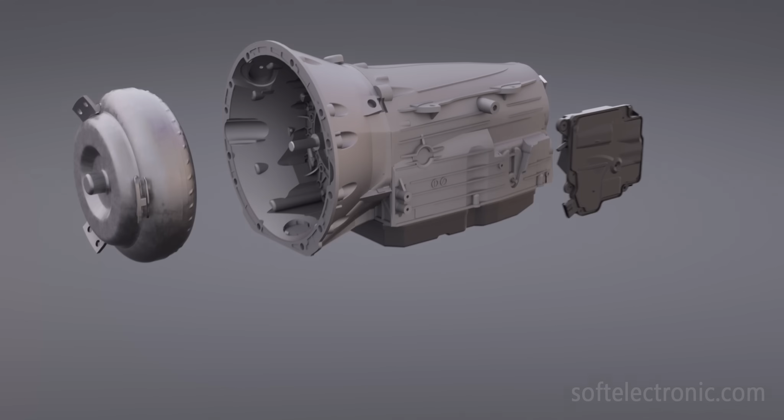In this series of 4 episodes, we will introduce you to the essentials of automatic transmissions. Today, we will look in detail into the advantages of modern automatic gearboxes, their general structure, and the modes in which they work. We will go through the symptoms and causes of an existing or forthcoming problem, and look into what general diagnosis and prevention of a gearbox is.

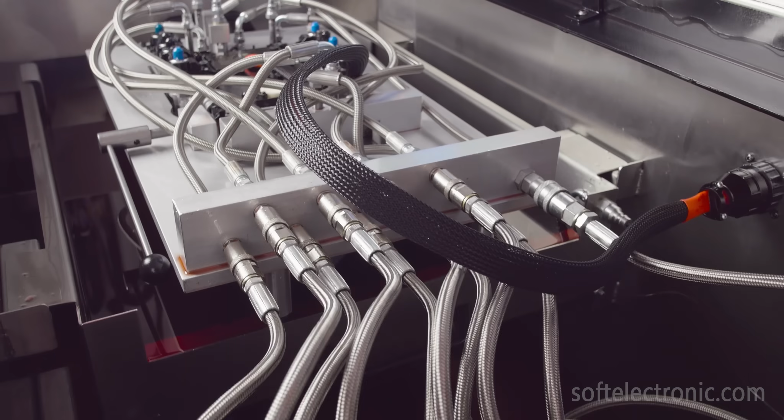In some countries, automatic transmissions have long been preferred over manual transmissions. In Europe, their share gradually increases, and with it, the service points and repair workshops. Diagnostic and repair of an automatic gearbox has become a routine procedure.

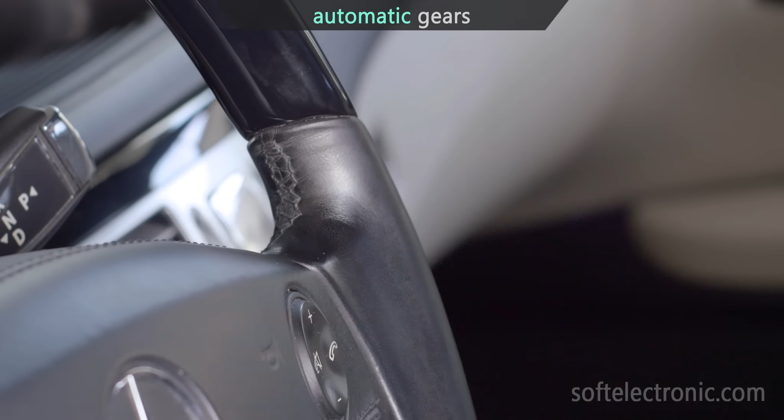Automatic gearboxes are without a doubt much easier to control than manual gearboxes. Driving in traffic is much more comfortable when you don't have to constantly switch gears. The wear of the automatic gearbox in an urban environment is much less than in manual gearboxes. The driver can drive by placing both hands on the steering wheel at all times. This reduces the risk of losing control in the event of an unforeseen situation in traffic.

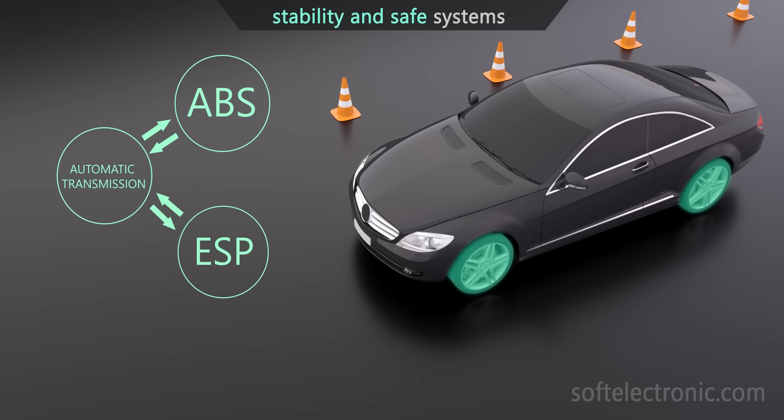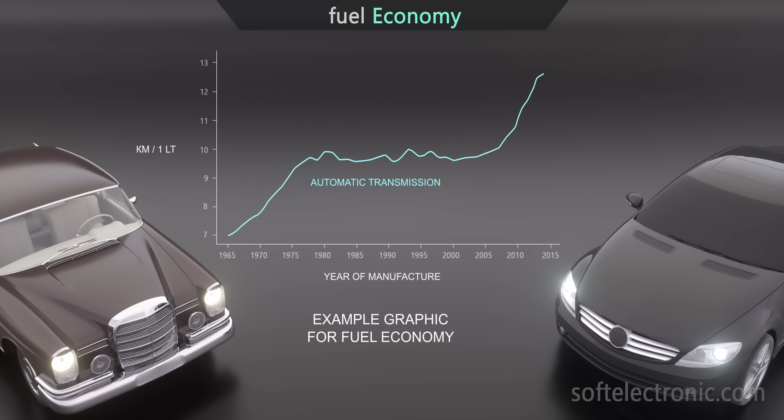Security systems like the ABS and ESP work far more efficiently when combined with an automatic transmission. Autopilot has more options controlling the switch to the necessary gear. Modern automatic gearboxes are more precise and more efficient compared to their predecessors, which makes them not only more comfortable but also as economical as the same car with a manual transmission.

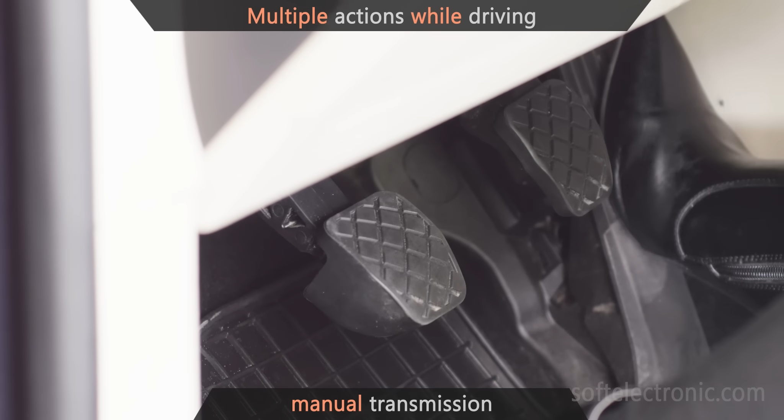In today's automatic gearboxes, the switching time between gears is measured in milliseconds, and it's much faster than switching times in manual gearboxes. The chances of an error during manual shifting are much greater, as the driver must periodically perform several actions during movement, each of which may cause an unintentional mistake.

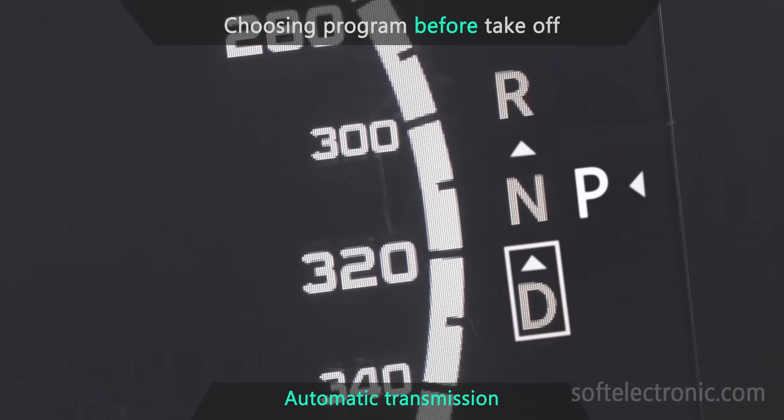In automatic transmissions, the main program for gear shifting is set before the vehicle starts, which minimizes the possibility of gear shifting error. The increase of torque in the automatic gearbox is possible due to the implementation of the torque converter. When driving off, the torque is increased at most.

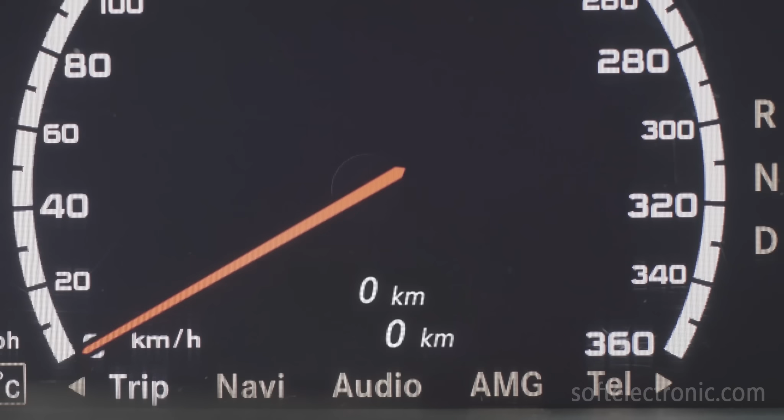With proper care and maintenance, automatic transmissions can have a long life, and repair and spare parts prices are gradually being aligned with those of manual gearboxes.

There are several main modes which are activated when positioning the selector lever. This lever can be connected mechanically to the gearbox or assisted by an electronic module which changes the control positions of the gearbox. The main positions are four.

Parking position is selected when coming to a complete stop so that the car is secure. In this position, movement of the chassis is impossible. In reverse position, the transmission is locked to the chassis and a reverse movement is performed.

In neutral position, the connection between the transmission and the chassis is interrupted. Thus, in case of an accident, the vehicle can be moved to a safe place or positioned on a repatriation platform. In drive position, the transmission is locked to the chassis and a forward movement can be performed.

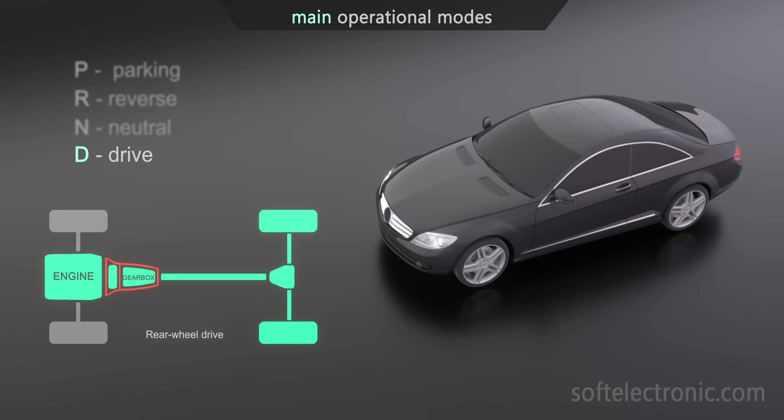The gears are automatically selected by the transmission control module according to the acceleration and speed of the vehicle. The change between positions must be performed only when the vehicle is stationary. For systems with an electronic module for selecting positions, there is a protection that will not allow a change if the vehicle is in motion.

Additional modes may also be available to assist the driver in different situations. In the manual shift or downhill mode, the driver partly takes over gearbox control. If engine revolutions and torque do not match the gear, the computer may in some cases correct the gear by raising or lowering it. The purpose of this action is to protect the engine.

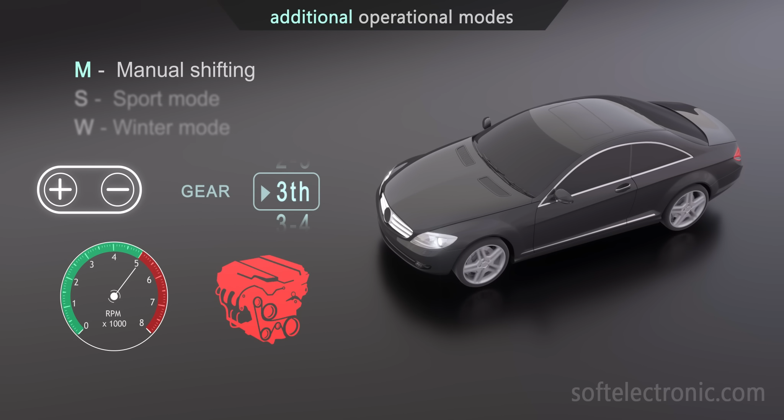In sport mode, the shifting occurs at higher revolutions compared to the standard. This is particularly useful for terrains with multiple turns and short stretches where greater dynamics are required. In most automatic transmissions, switching to lower gears in sport mode is maintained in the same speed range as in the standard program.

In winter mode, the control unit executes a special program for changing gears. In this mode, the takeoff occurs at a higher gear, and thus the initial torque is reduced. This prevents the vehicle from wheel spin on snowy or slippery terrain.

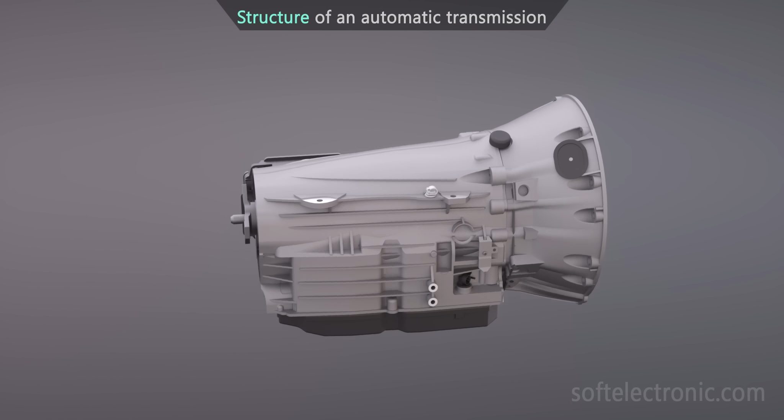To get to know the structure of a standard automatic transmission, we're going to take a look at a 7-speed 7G-tronic with 722.9 code, used in many models of Mercedes-Benz.

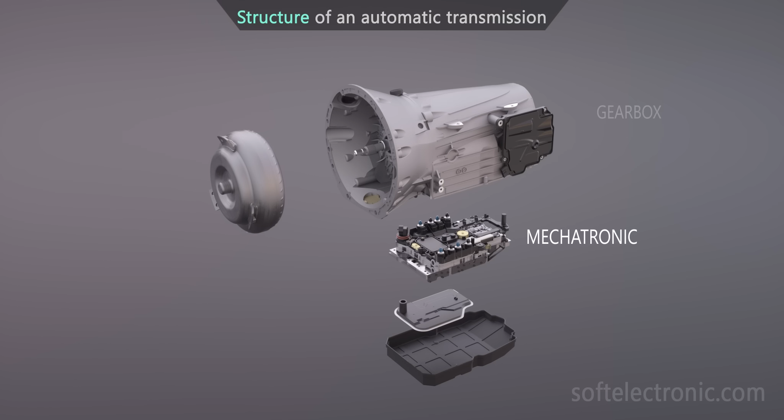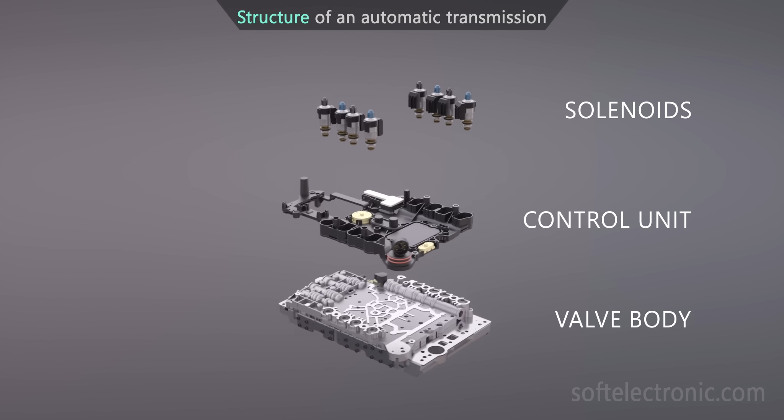We can divide the automatic transmission in three main categories: mechatronic, gearbox, and torque converter. The mechatronic is the control center of the transmission. It consists of the transmission control module (TCM), the valve body, and solenoids. Its purpose is to control the other parts in the gearbox through transmission oil under a certain pressure, which is fed at a specific moment during vehicle movement.

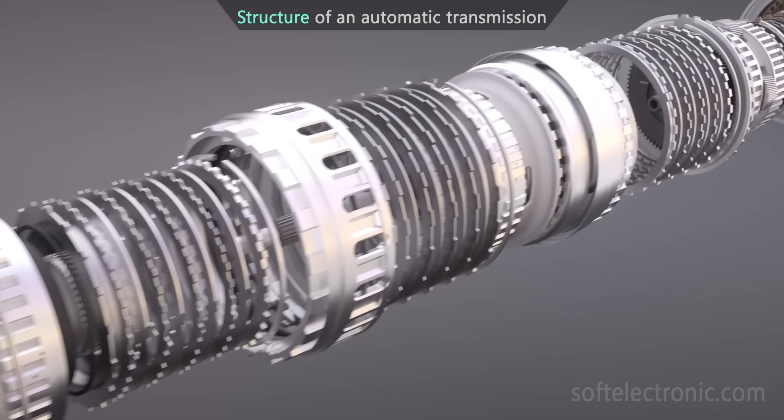In the gearbox, the mechanics go through different modes that characterize a certain gear. It consists of group shafts, gear wheels, clutch packages, and seals. In the front is the oil pump, which is firmly connected to the crankshaft of the engine through the housing of the torque converter.

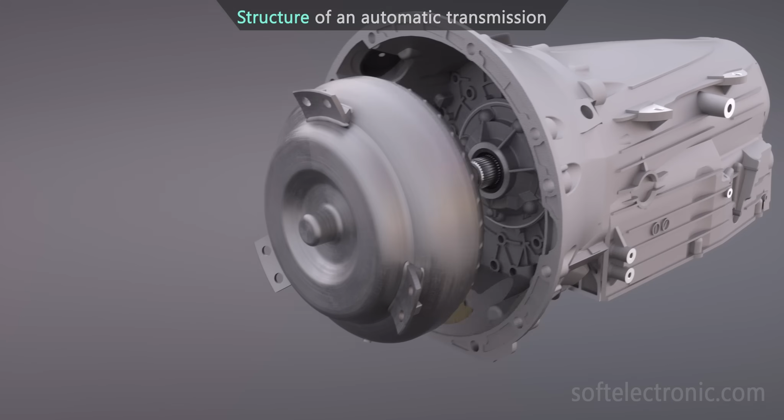When the engine is operating, the pump is constantly feeding transmission oil to the mechatronic. The torque converter is a fluid-based clutch between the engine and the transmission. It has several main functions: it transfers motion from the engine to the transmission, it drives the oil pump in the gearbox, and increases the torque from the crankshaft to the transmission during the movement of the car. When driving off from a standstill, maximum torque is produced. It also operates as a flywheel, neutralizing the oscillations and vibrations from the engine to the transmission.

In the lower part of the gearbox is the transmission pan and the oil filter. Softelectronic is one of the few companies in the world which has repair workshops both for mechanics and electronics for certain automatic transmission models.

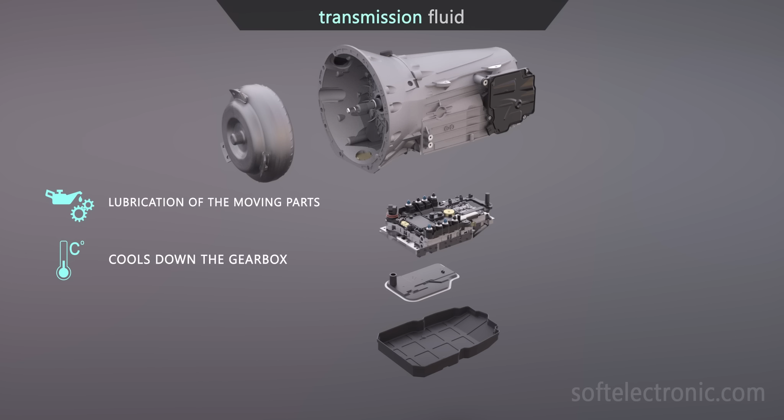In the gearbox circulates transmission oil, which has three key functions: it provides the necessary lubrication of the moving parts, helps the cooling of the automatic transmission, and takes part in the hydraulic system, which mechanically controls the components in the gearbox.

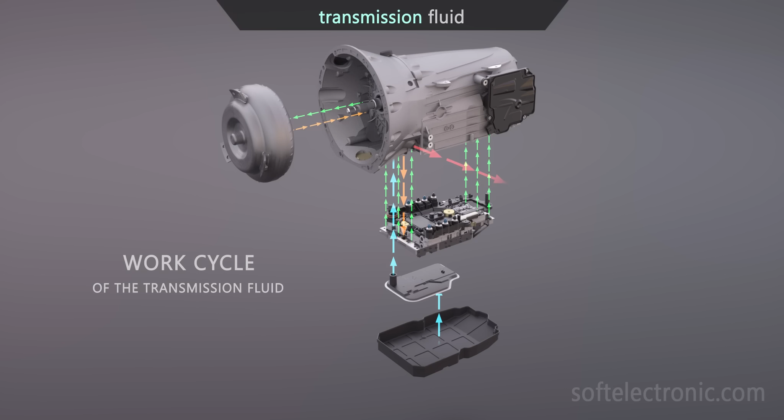The oil has the following work cycle: from the oil pan, it goes through the filter, and from it into the oil pump. The oil pump then forces it into the valve body of the mechatronic at high pressure. The mechatronic regulates the pressure and distributes it to the torque converter and the various sections of the gearbox. After that, the oil goes through the cooling system and re-enters the transmission pan for the next cycle.

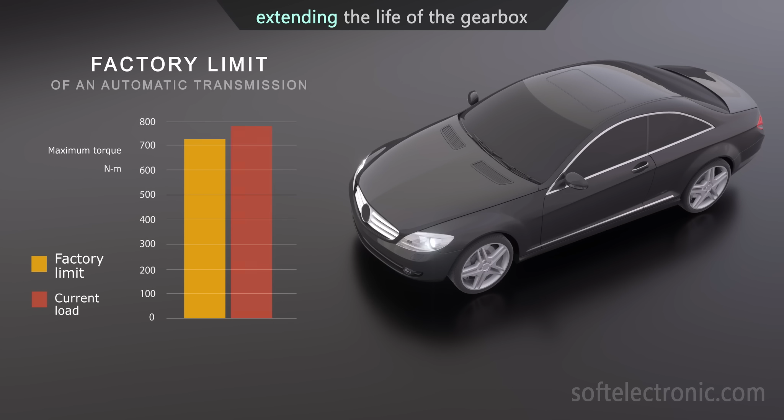Here's some advice if you want to extend the life of your gearbox. You shouldn't overload the vehicle above the factory limit. For example, when tuning the car, you shouldn't exceed the torque limit value described by the manufacturer. Aggressive driving may lead to shortening the life of the gearbox.

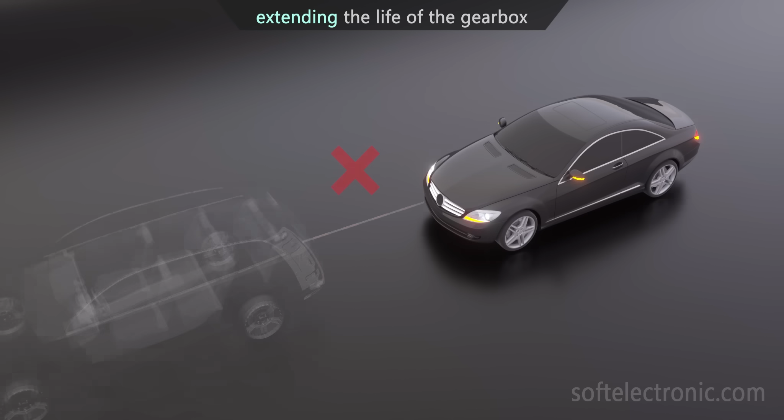In case of emergency, it's not advisable to have the vehicle towed by another vehicle, because the lack of active lubrication may cause a serious defect in the gearbox. Transportation with a repatriation platform is recommended for this purpose.

In winter conditions, it's advisable not to take off as soon as you start the car. You should limit the actions which could cause overheating in the gearbox, for example, when you try to unblock the car in winter conditions, or control it on slippery terrain by repeatedly throttling in one place.

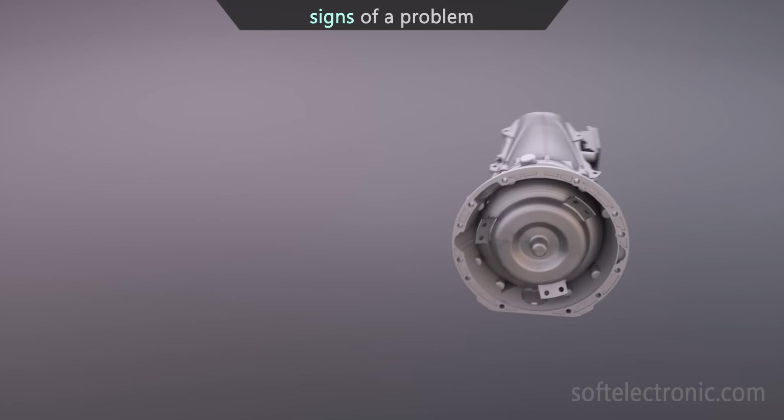One of the most important things is to look for signs related to the incorrect operation of the automatic transmission. When developing any of them, it's advisable to make timely diagnosis and repair if needed. Here are some of the signs.

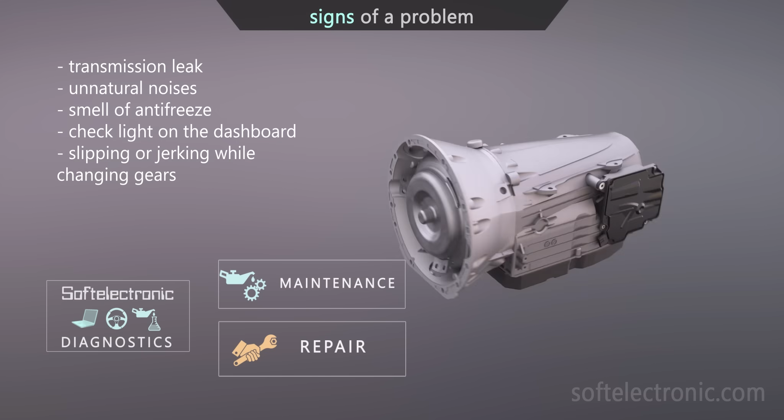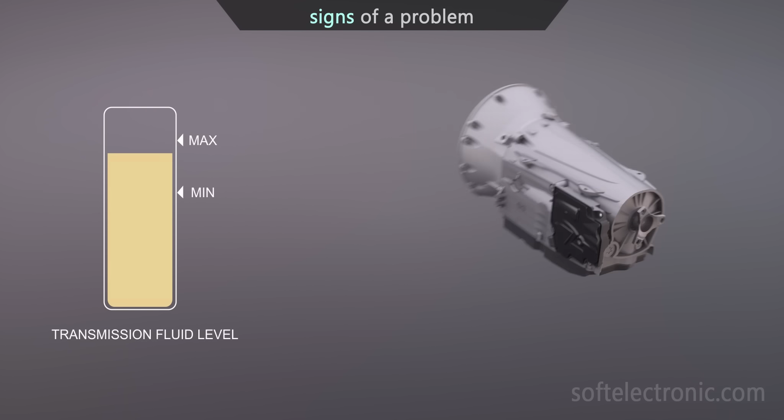Even the smallest leak of transmission oil can lead to a decrease in the level of the oil. In this case, it's best to have it checked in a specialized workshop. Lack of oil can cause overheating and defecting of electronic or mechanical components in the automatic transmission. Overheating can also occur if the cooling system is defective. This is why it's important to have it regularly checked.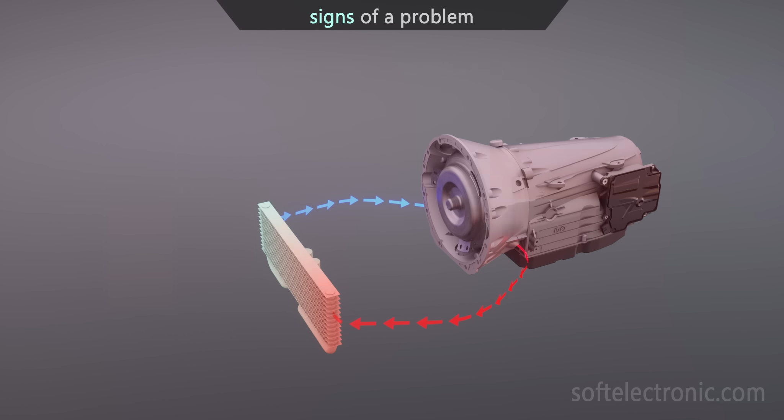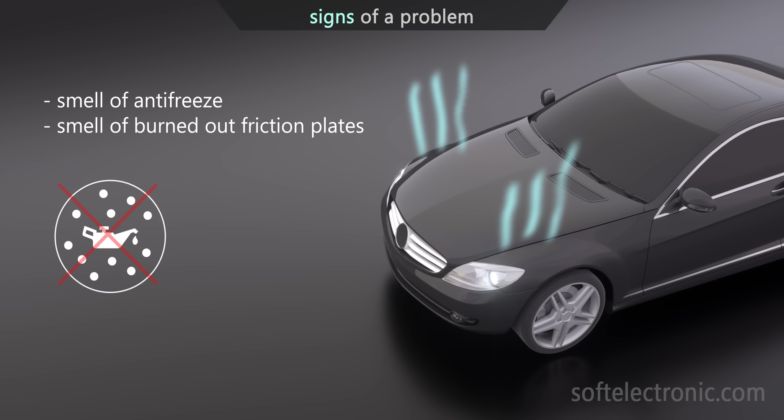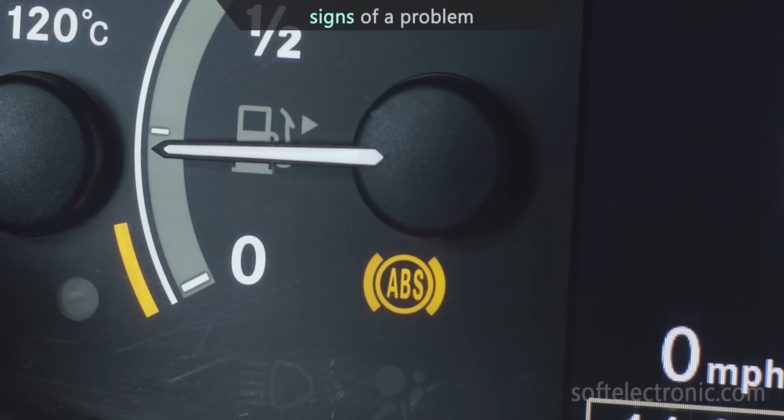Smell of antifreeze or burned out friction plates can also be related to the gearbox. It's unacceptable to have small particles in the oil from mechanical parts and liquids that are not part of the transmission oil composition. The check light on the dashboard for problems with the engine or the ABS systems is not necessarily related to the gearbox, but this can only be diagnosed in a repair workshop.

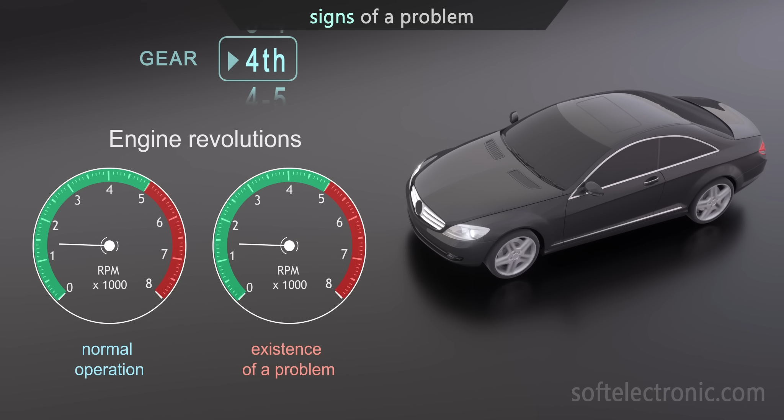The appearance of unnatural noises coming from the position of the gearbox is a symptom of a mechanical problem. The gears should change smoothly. If there is a problem with the gearbox, you could feel jerking while changing gears, or you could also feel slipping in some cases. The driver can notice a sharp increase in revolutions while changing gears. In this case, it's advisable to have the vehicle diagnosed and repaired in a specialized workshop.

The appearance of the mentioned signs can cause the vehicle to go into safe mode. In this mode, the car remains in one gear, usually a low gear, and serves only to move the vehicle to the nearest safe place, from where it can be transported to a repair workshop.

In the Softelectronic workshops, vehicles with automatic gearboxes can be diagnosed, maintained, and repaired.

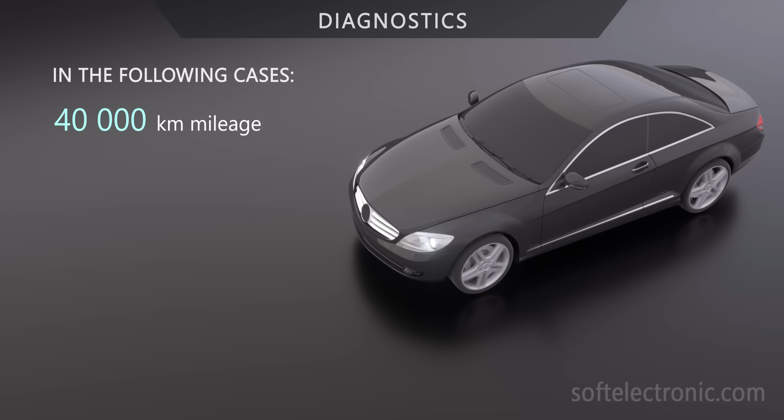It's advisable to have the gearbox diagnosed in the following cases: after 40,000 kilometers since the last diagnostic, in case you suspect deviation from the normal operation of the gearbox, or in case you buy a pre-owned vehicle.

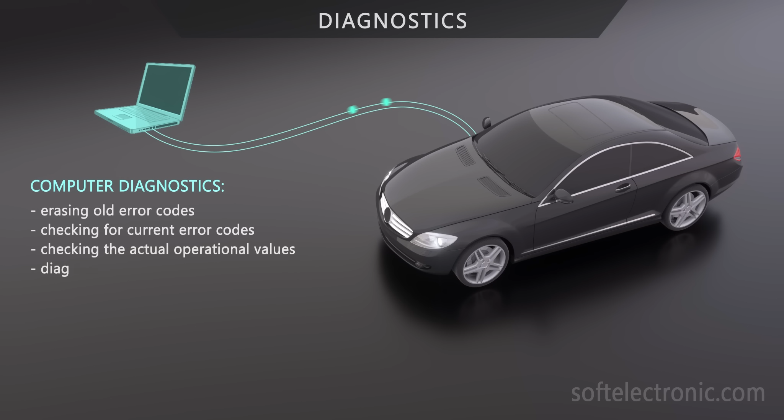The procedures completed when diagnosing a vehicle are computer diagnosis, test of the vehicle, and analyzing the transmission oil. Under computer diagnosis, the vehicle is checked for stored error codes in the mechanics and electronics, and the operating values at which the gearbox operates are also checked.

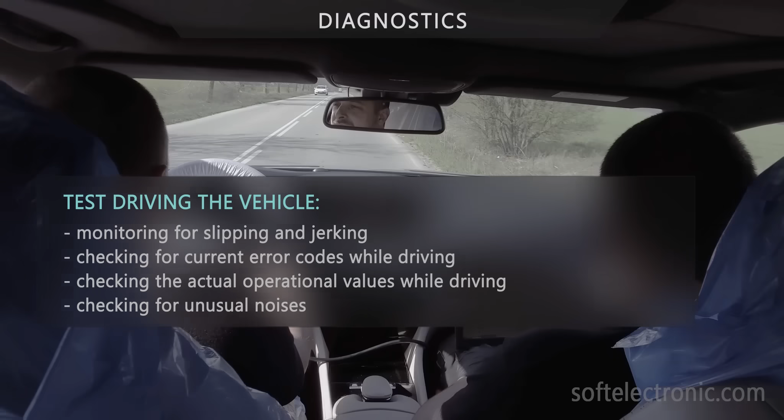When testing the vehicle, service technicians monitor the behavior of the gearbox in real conditions. They look for signs of slipping or shaking while changing gears, and may also discover unusual noises that are a sign of upcoming or future problems.

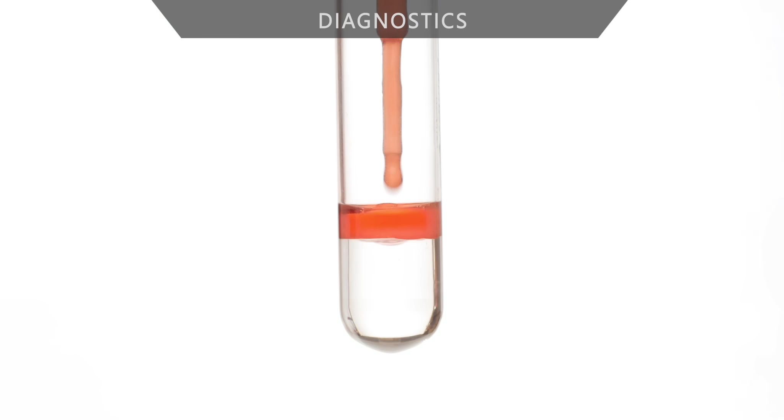Finally, the transmission oil in the gearbox is analyzed. A sample is examined for solid particles. Afterwards, a chemical test is performed to verify if there's a presence of glycol and other liquids, different from the composition of the transmission oil.

Timely diagnosis by a specialized service for automatic transmissions can prevent costly repairs. Following the results of the diagnosis, we proceed with maintenance or repair if needed.

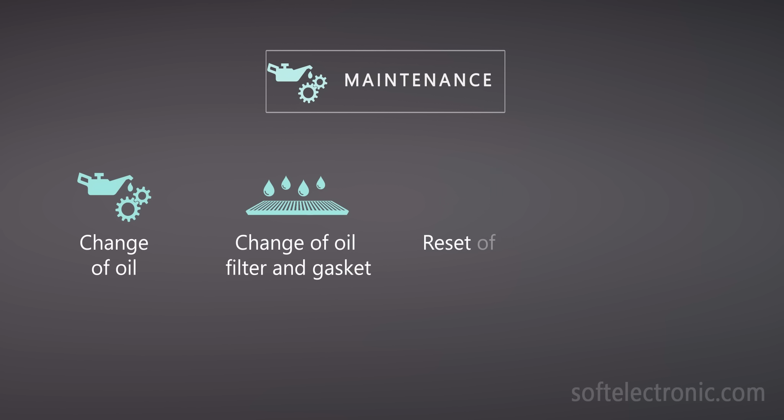Maintenance is needed if the results from the diagnosis show that only the oil needs to be changed. The maintenance consists of changing the old oil with new oil, replacement of the oil filter and gasket of the transmission pan, reset of the electronics, and performing adaptations if needed.

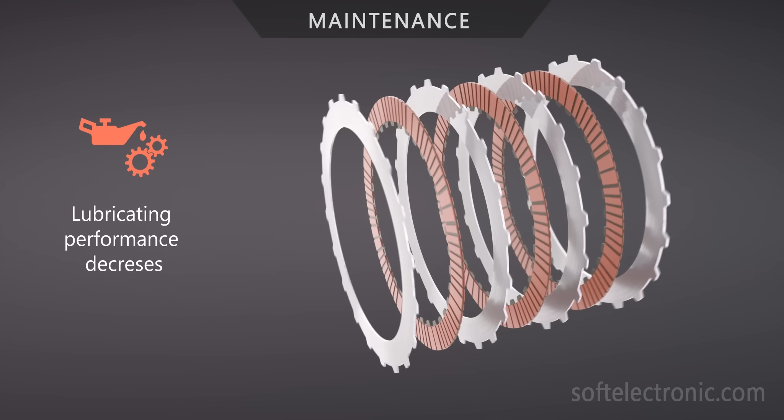Replacement of the old oil is needed for the following reasons: the lubricating performance decreases over the course of the operating cycles, which can result in wear of the mechanical parts.

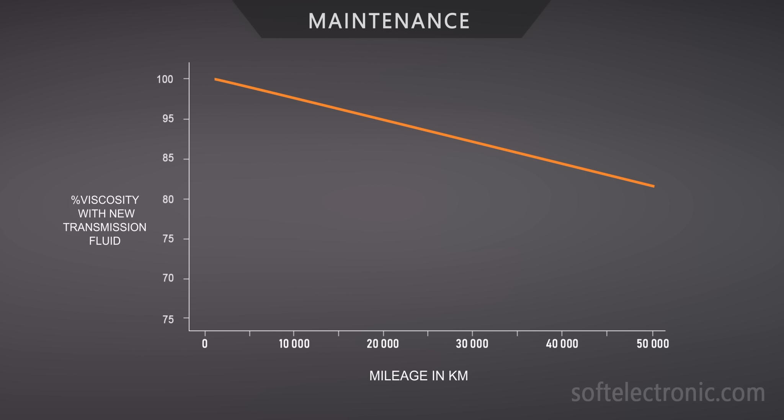The microparticles produced from the friction of the friction plates begin to wear the mechanical components in the valve body, clog the filter, and form coating on the internal parts of the gearbox. Because of numerous thermal cycles and continuous working pressure, the viscosity of the oil changes, which can lead to incorrect execution of commands in the gearbox, causing slipping and flaring.

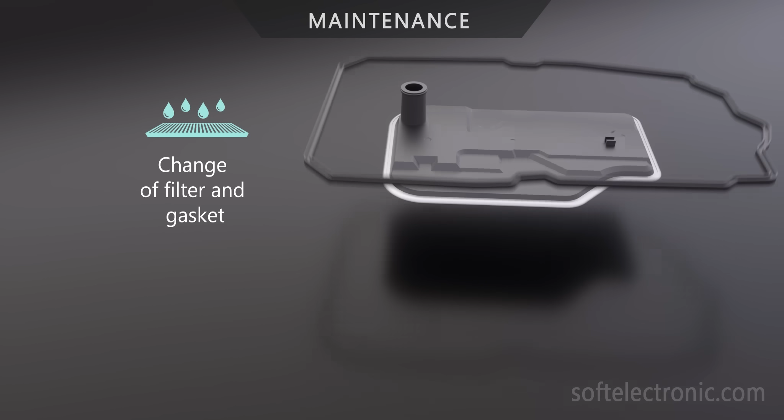The oil change is performed using a specialized station which ensures correct replacement of the old oil. The oil filter and transmission pan gasket are also replaced. Gearboxes with control units will need to be reset and then adapted.

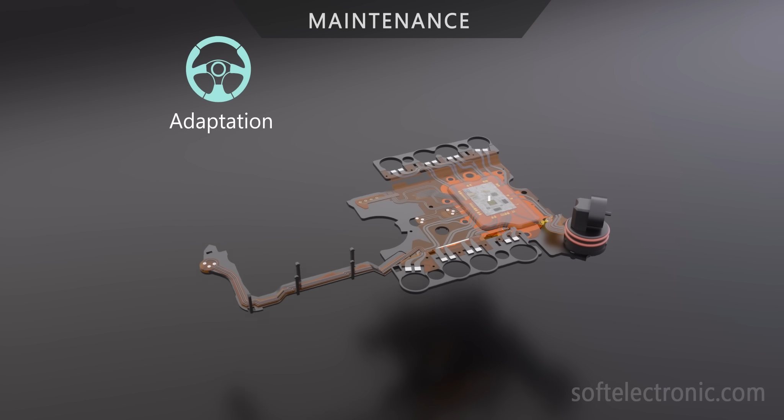The reset is a process in which the control unit is returned to its factory settings. The adaptation is a process in which the control unit is programmed or self-programmed to switch gears in the most optimal way, given the current condition of the mechanics and fluids in the gearbox. That's why after oil replacement, it's necessary to perform resetting and adaptation.

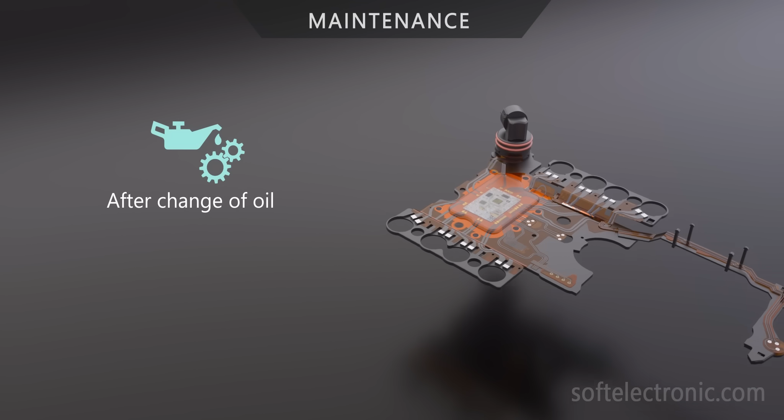In different models of gearboxes, these procedures are done in different ways. For example, the 7G-Tronic needs about 40 minutes of test driving, during which service technicians perform both procedures.

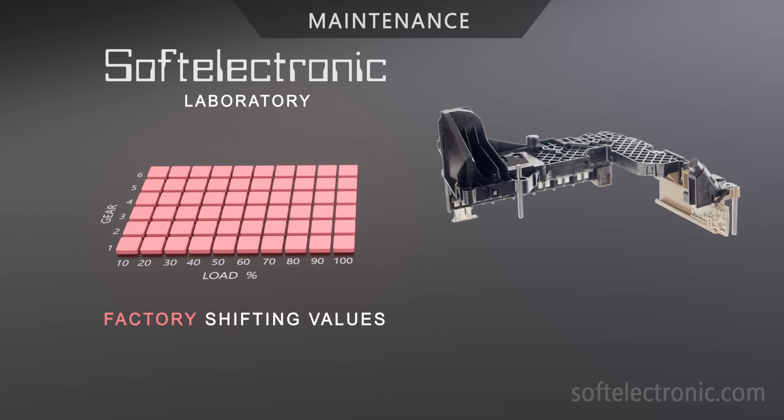In other gearboxes, like the ZF6HP used by the VAG group, it's necessary for the control unit to be unmounted and reset with specialized equipment, which Softelectronic has. The control unit is then mounted back in, and it self-adapts as the driver periodically drives the vehicle.

A repair is performed if the diagnosis shows the following results: if computer diagnosis shows system errors that indicate a problem in the control unit or mechanics of the gearbox, or if there is slipping, flaring, vibrations, or noise coming from the gearbox during test drive.

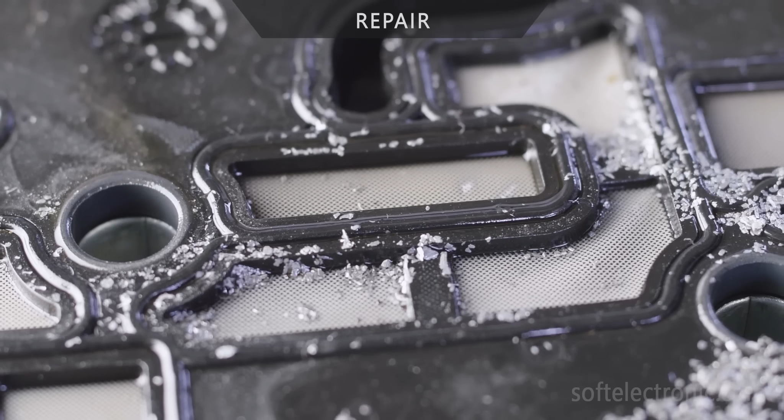Presence of large particles from mechanical components in the transmission oil, or presence of glycol or other liquids different from the composition of the transmission oil, also indicate a repair is needed.

The purpose of the repair is to restore the factory quality of the automatic transmission and its optimal operating characteristics for as long as possible.

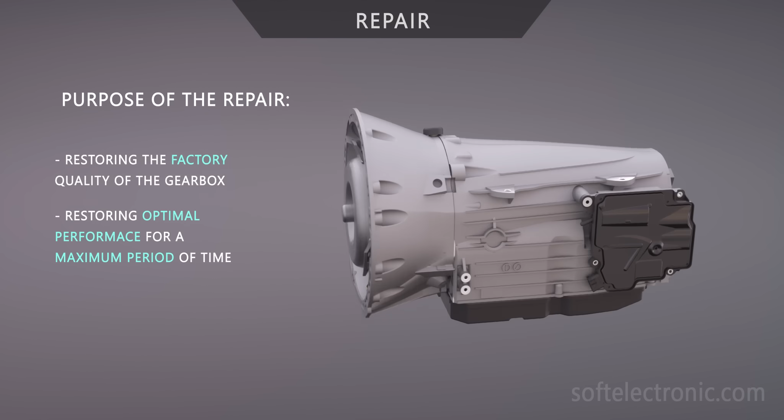For this reason, our workshop provides the necessary parts from world-famous companies like Automatic Choice. At Softelectronic work some of the best automatic transmission mechanics and electronic specialists.

In the next episode, we'll get familiar with the way of working, controlling, damage prevention, and repair of the components in the mechatronic.